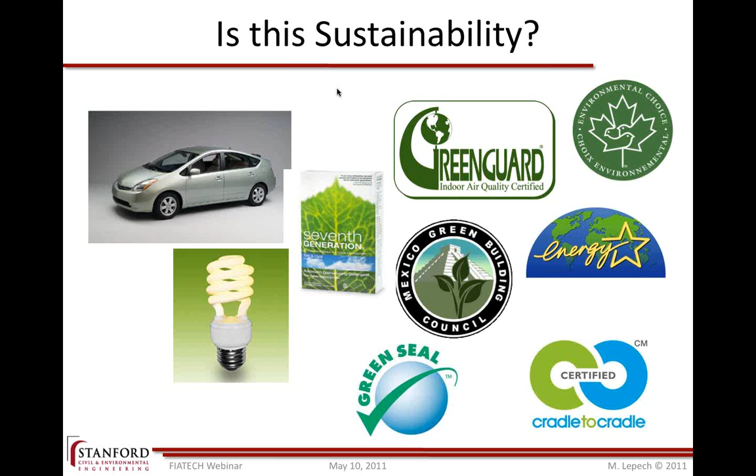The way we accomplish that here is by looking at the entire production, consumption process, and all of the material and energy flows associated with that. We start by looking at raw material acquisition, if we're constructing or producing any products—starting from where we get resources out of the ground, where they're processed, how they're manufactured, assembled, or constructed, how they're used, what the service looks like, how they're retired and recovered, whether they're recycled, remanufactured, or finally disposed.

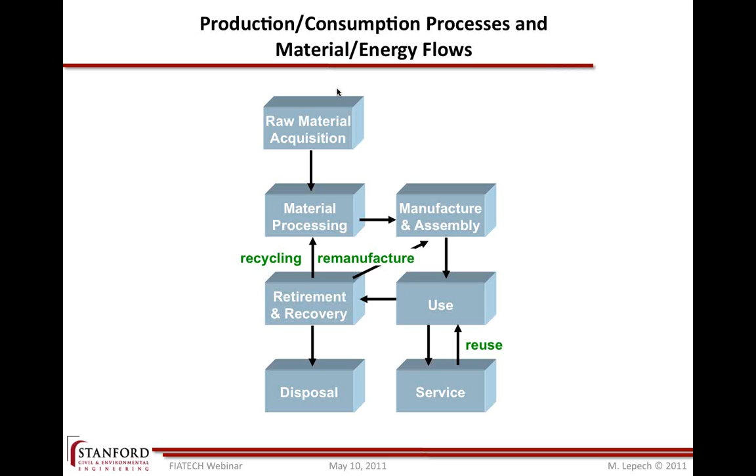So then what we want to do is put together a set of metrics that describe our ability to continue to do those processes in perpetuity, without harming ourselves or the natural ecosystems around us. So whenever we talk about sustainability, I want to talk about the specific metrics we're going to use to describe that.

We have a population here on the planet, and a set of needs we're trying to meet—to clothe ourselves, shelter ourselves, feed ourselves. In order to do that, we've come up with a set of highly complex production and consumption activities that provide all of our needs. And to do those activities, we've come up with a very complex set of material and energy flows to get goods and services where they need to be all over the planet.

And of course, when we engage in those activities, we force changes on our ecosystem, whether that's due to resource depletion, ecotoxicity, or something as controversial as global climate change. Everything we're doing has an impact, if not regionally then globally, on the world around us. So what we're really trying to do with sustainability is measure our ability to meet those human needs that as a population we've forced on ourselves.

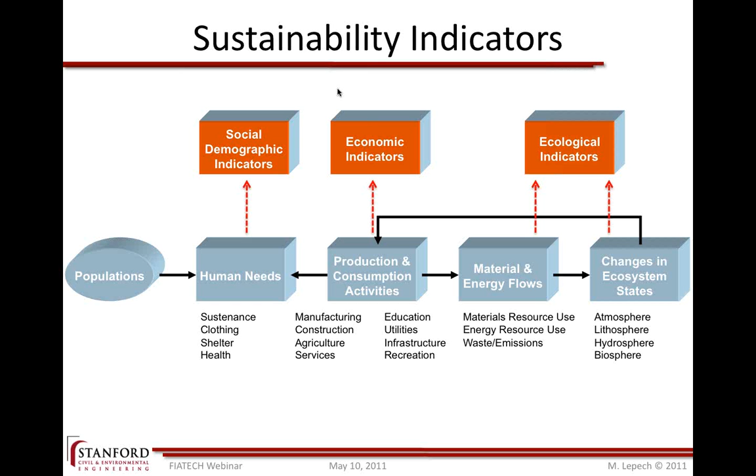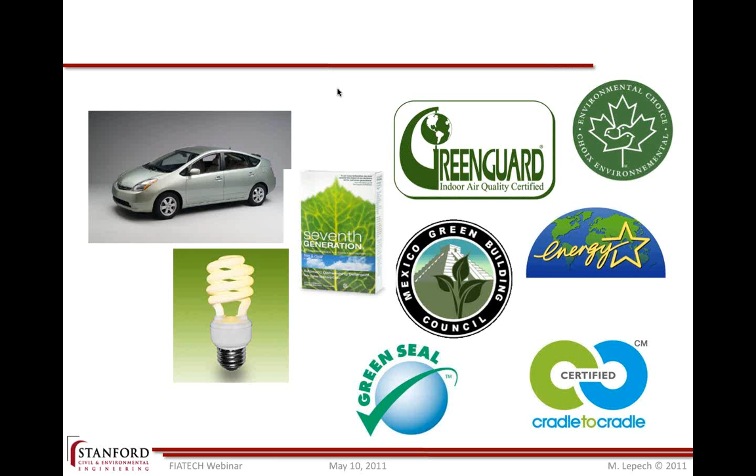But where does that relate to all of these labels and things? Well, we'll talk about how those actually connect. And then there's one type of green here in the United States that we're all very focused on—it has to be part of the equation for us to make sure this makes sense, because otherwise it's a very altruistic thing, and that's really not the point at all.

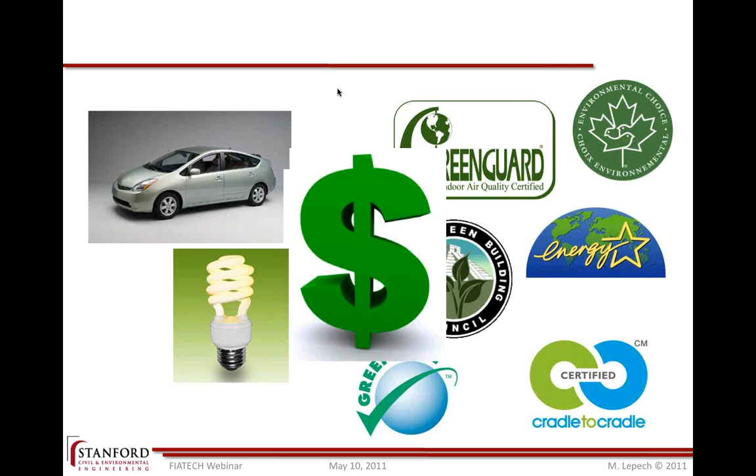So in the outline today, I wanted to talk about what quantitative sustainability assessment is, in particular life cycle assessment. We'll talk about how to link that to industry through the class that we have here, CE 226.

And finally a summary. So there are a number of standards that govern life cycle assessment, at least process-based life cycle assessment, and those come from ISO, specifically the 14040 series standards for life cycle assessment, and there's also 14020 that looks at environmental labeling.

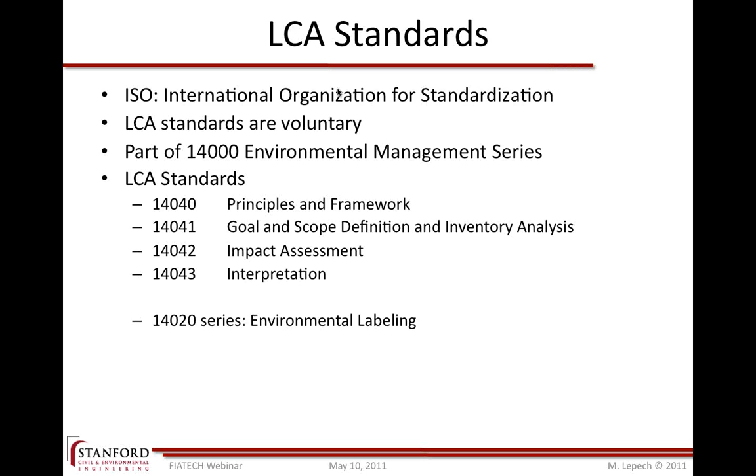So within that standard, we're guided to look at all of the different pieces of the supply chain going back to that raw material acquisition. And so we'll look at every single piece of that, and also those T's represent the transportation between each one of the nodes of the supply chain.

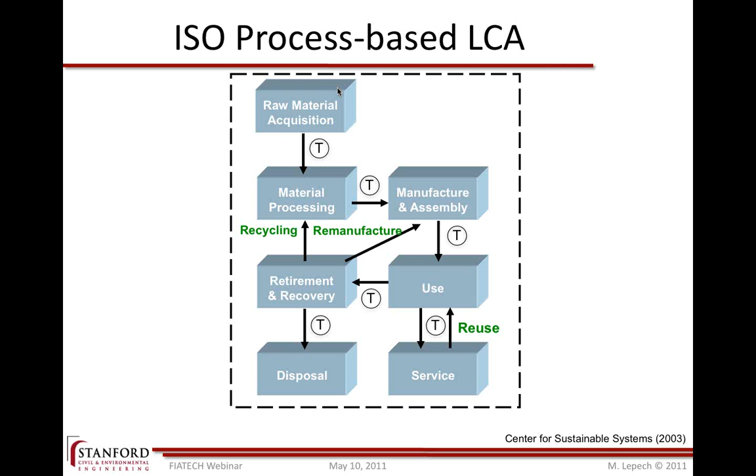We'll draw a boundary around all or part of that system, and then we'll start to measure things—everything that comes in and everything that goes out across that boundary: primary materials, recycled materials, primary energy.

We may also measure labor and capital. And then coming out, we measure things like air pollutants, water pollutants, solid waste, the products that we're actually making, because we're doing all this for a reason, and any co-products that are also produced. Those are things that have economic value, but weren't actually what we intended to make.

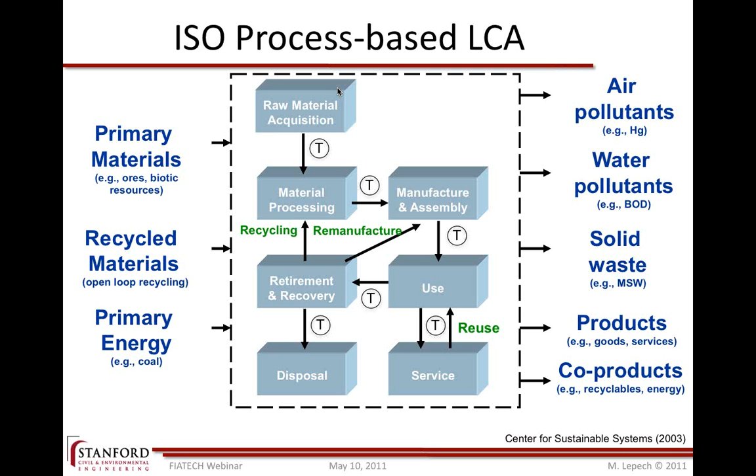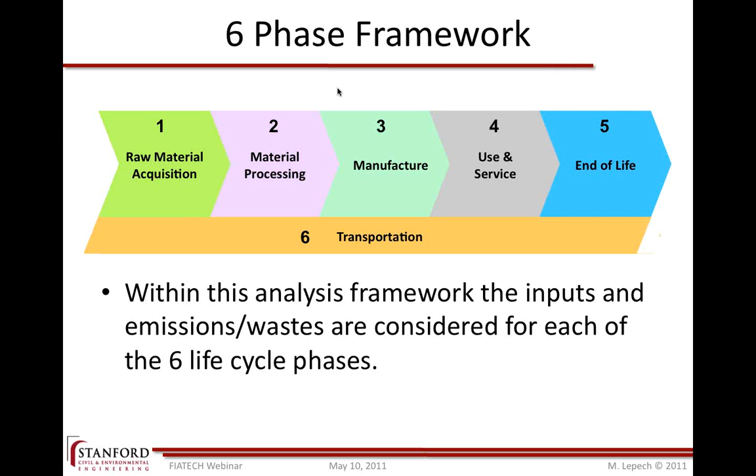So I refer to this as the six-phase framework. It starts with raw material acquisition, then material processing, manufacture, use and service, and end of life, and then transportation throughout. So within this framework, we want to account for all the inputs and outputs in each of these life cycle phases.

So what does this type of analysis look like? This is exactly what we go through and learn to do in the class that I teach here, and in the projects that students do with corporations.

This was an example that we did for the Monterey Bay Aquarium Research Institute. For those of you in Northern California, or who have visited, you may have been to the Monterey Bay Aquarium. They have a tremendous exhibit there for the sea life here in Northern California, and a research institute used to study the fish and keep them healthy. Also, when they're cleaning the tanks, they have some large aquariums that they keep all of their sea life in during maintenance.

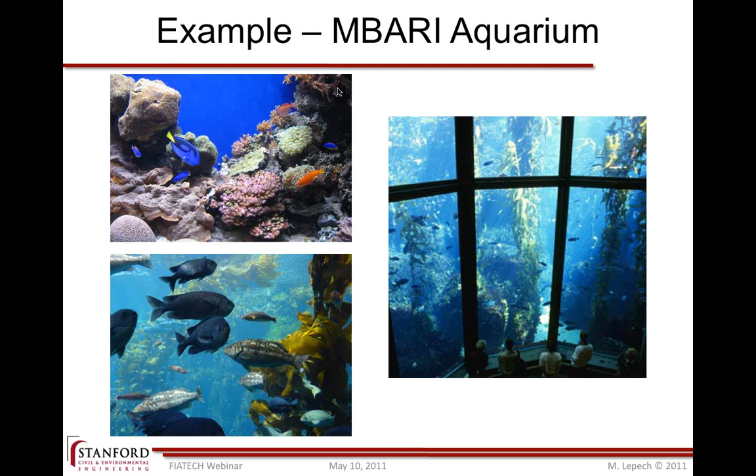So they wanted to build some new tanks at their facility, and being an ecologically sensitive and environmentally active partner, they wanted to compare the construction of a regular concrete tank, shown on the left, versus a tank made of fiber reinforced polymer. They had two bids for these, and wanted to know which one would be better for the environment, given that the price differential was so close.

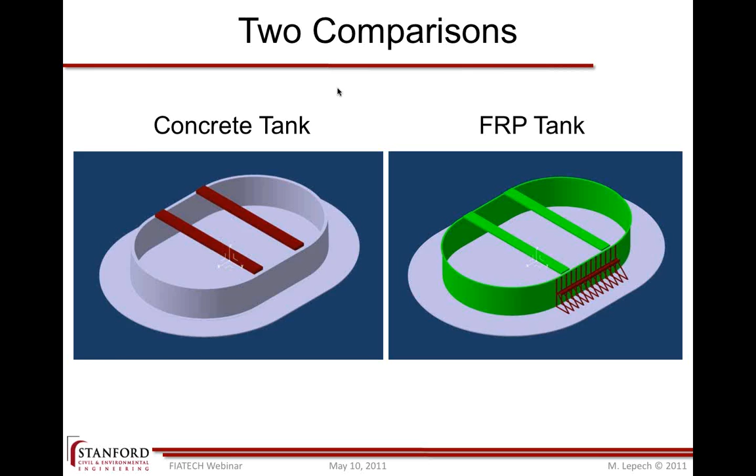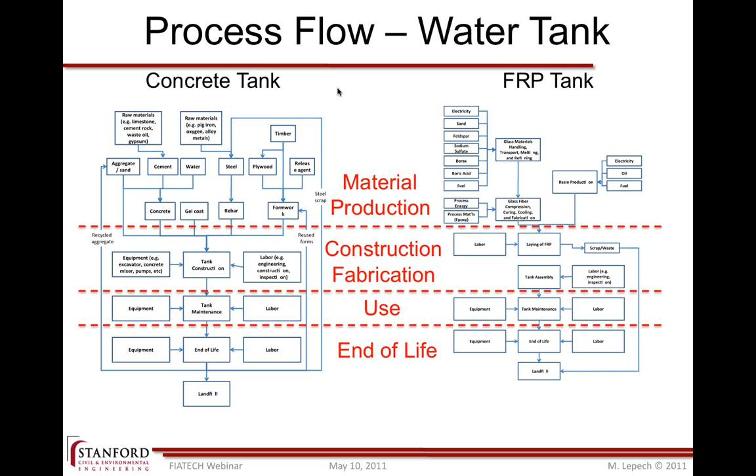So it starts with the construction. The students and researchers have to start by constructing a process flow diagram that describes how each one of these systems is built, used, maintained, and finally disposed of at the end of life throughout its entire life cycle. Along this process flow, we can see it divides into the material production parts, construction and fabrication, a use phase, and an end of life.

And then if I blow some of these parts up, we can see that the concrete tank requires raw materials of limestone, cement rock, gypsum, pig iron, and timber for formwork. We use that to make concrete, rebar, and formwork. For the FRP, it requires inputs of electricity, sand, borax, and fuel to make glass, and then electricity, oil, and fuels to make our FRP resins. We'll go back all the way through the supply chain to the extraction of those materials out of the ground.

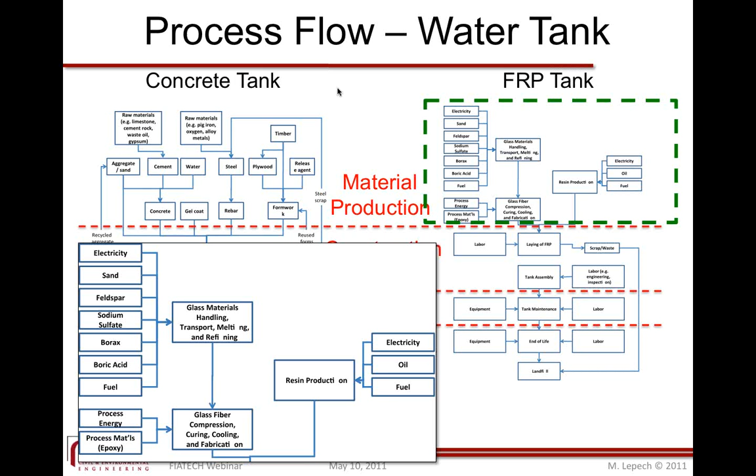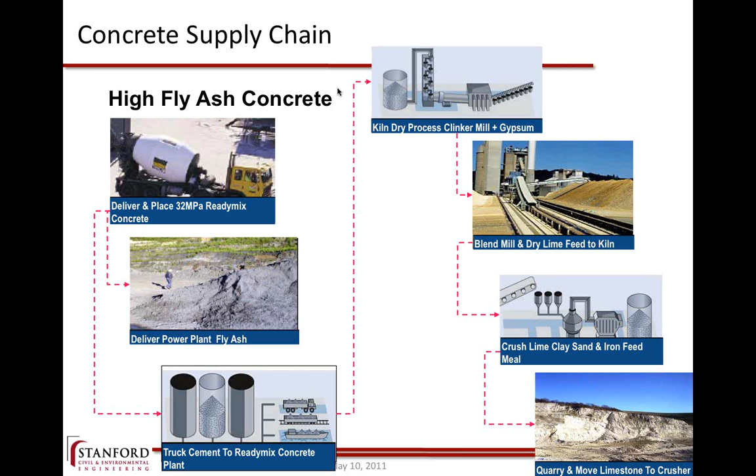So then we'll put together a high-fidelity supply chain model. In this case, this is the supply chain for the high fly ash concrete that they were planning on using, and we account for all of the inputs going in and out to get that concrete, from the limestone quarry all the way to putting it onto the site.

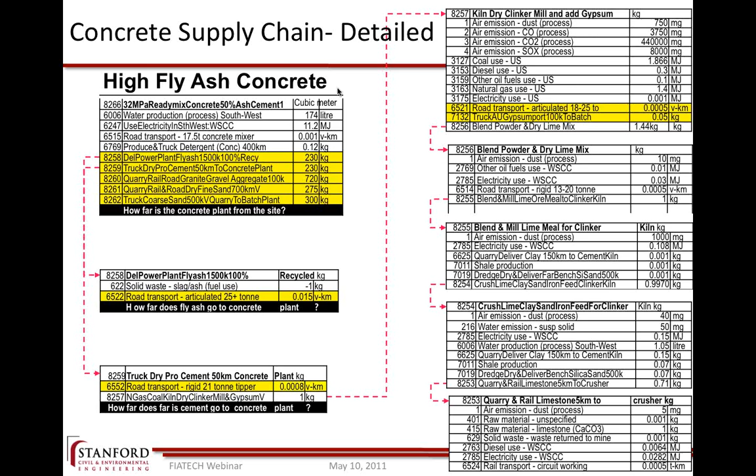Most people don't have a very good idea of what it takes to extract limestone, and how much energy, material, and emissions are associated with the removal of limestone, or the production of electricity or fuel oil. So what we rely on are industry data sets that give us this information in aggregate for the entire industry, called life cycle inventories.

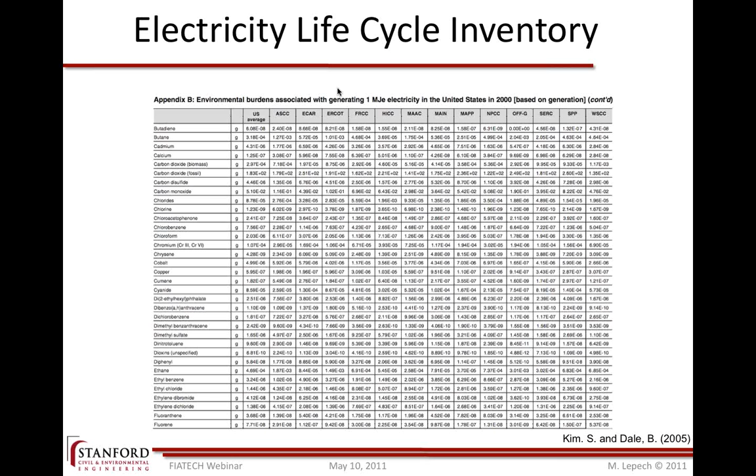Here we're looking at the electricity life cycle inventory for the United States. I'll blow up a small piece showing that for the production of 1 megajoule of electricity, our functional unit in this case, we can see the average emission from a U.S. power plant. Here's everybody's favorite emission, carbon dioxide, fossil-based. To make 1 megajoule of electricity, we release approximately 183 grams of CO2 on average.

We can use data sets like this to go back and determine how much electricity was consumed in production along the entire supply chain, and then compute on average how much emission and what emissions are associated with this activity.

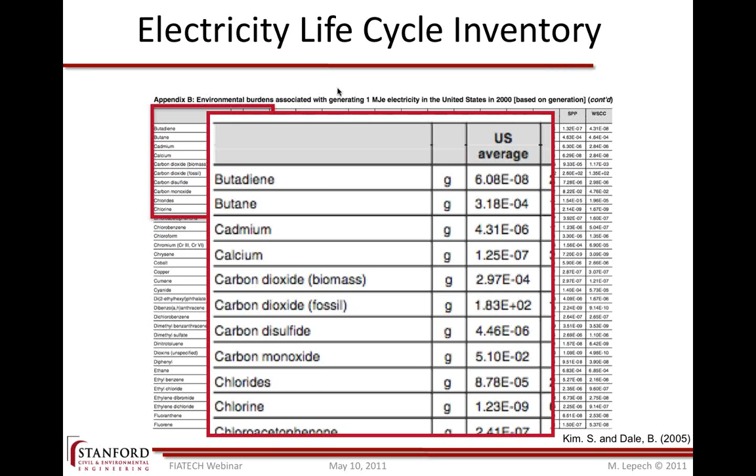Similar data sets exist for all kinds of different materials, not just energy. Here we're looking at a process flow diagram for the production of polymers. Most of our polymers come from crude oil, natural gas, and brine, and through all kinds of chemical processes, we can make whatever we want.

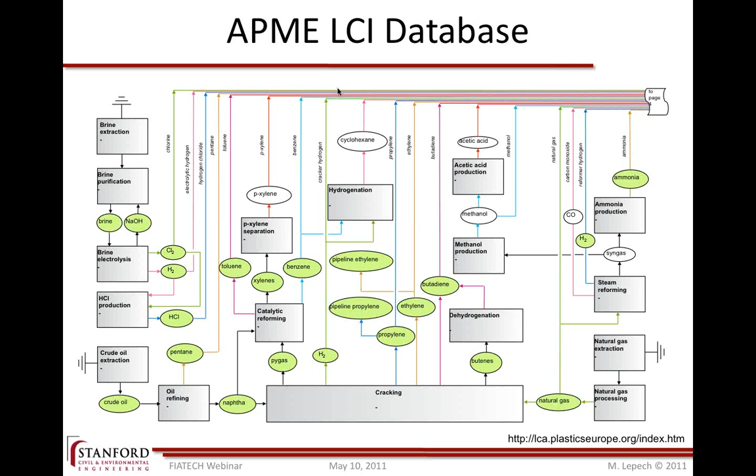In this case, we're looking at the life cycle inventory, or LCI, for a high-density polyethylene resin. To make 1 kilogram of HDPE resin requires approximately a total energy input of 77 megajoules.

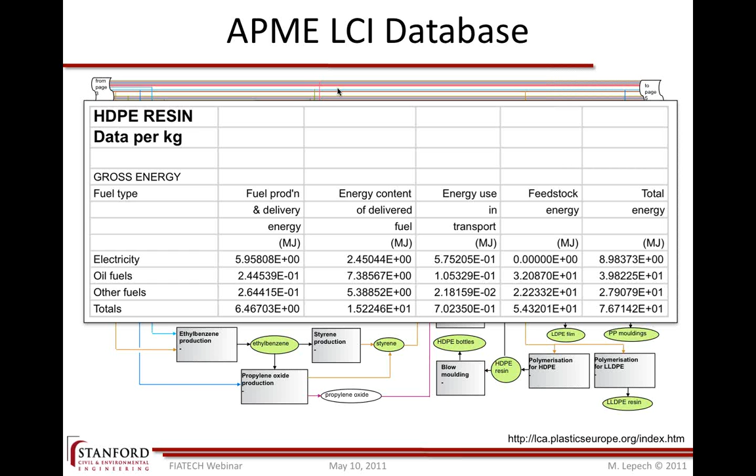So if you know how many kilograms of material in your quantity takeoff, you can start to determine what the impact of your project is going to be.

Once again, here we're looking at the air emissions associated with that same kilogram of high-density polyethylene. Looking at CO2, roughly a kilogram and a half of CO2 is released from extracting the oil from the well to producing 1 kilogram of HDPE. So every time you look at one kilogram's worth of HDPE, there's about a kilogram and a half of CO2 in the atmosphere associated with that production.

Once we have our process flow diagram and our quantity takeoff from our structures, then we can start to get a larger idea of what the overall impacts are going to be for these processes.

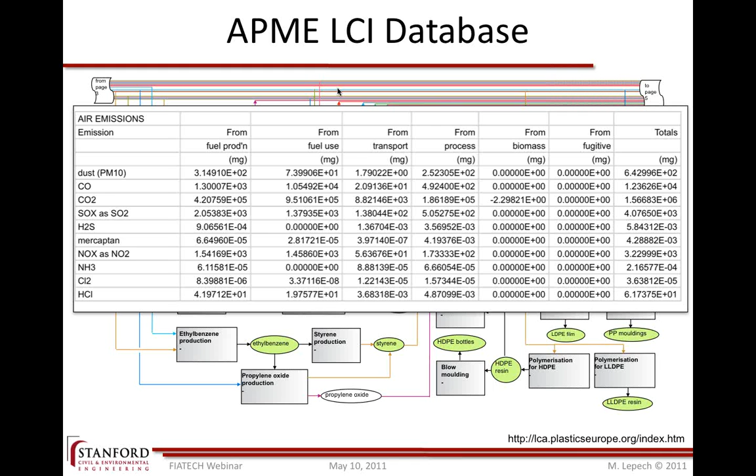Then we'll take all of those specific emissions, listed in a big, long laundry list of impacts, and group them into input-related and output-related impacts. Input-related impacts are things like abiotic or biotic resource extraction, so renewable versus non-renewable resources, and also land use. For output-related categories, we take emissions related to global climate change and group those together, as well as those related to ozone depletion and human toxicity, grouping these into a relatively small number of impact categories so we can start to make choices between them.

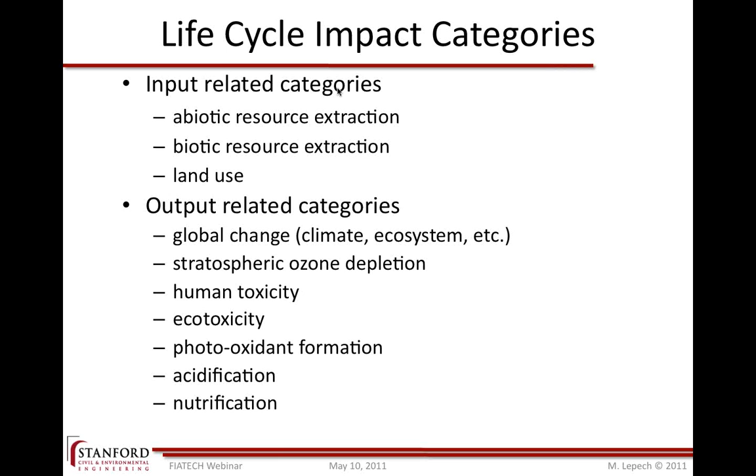So you can start to make comparisons between products or product decisions as to what you want the footprint to look like. And of course, in most cases, you're going to be going with a smaller footprint.

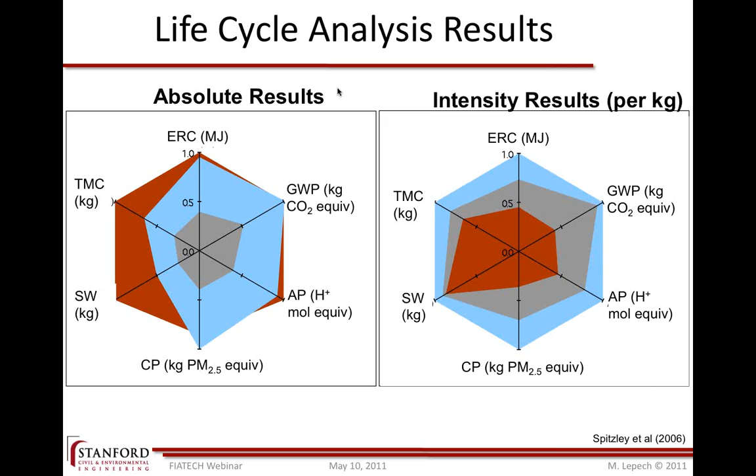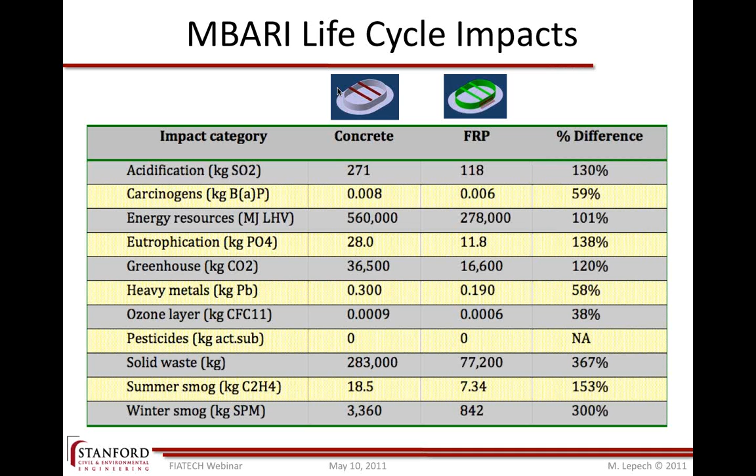Then we look at the percentage differences, and we can start to see if indeed one system is better than the other, all the way back from the initial start of the life cycle. At that point, we want to get pushed forward to drawing some conclusions and making some recommendations. So we can start to weight among the various factors, identify major burdens and impacts, and then select among the alternative design decisions.

So at that point, I don't know, Nicole, were there any questions that came up, or are we doing okay? Right now, we are okay. We have no questions, but folks who do have any or want clarifications, please use the questions tab and type those in. Do you have any questions, Nicole? No, we're all set. Okay, good.

All righty, so that's kind of the overall structure of the class, and what we try to accomplish over the course of the quarter.

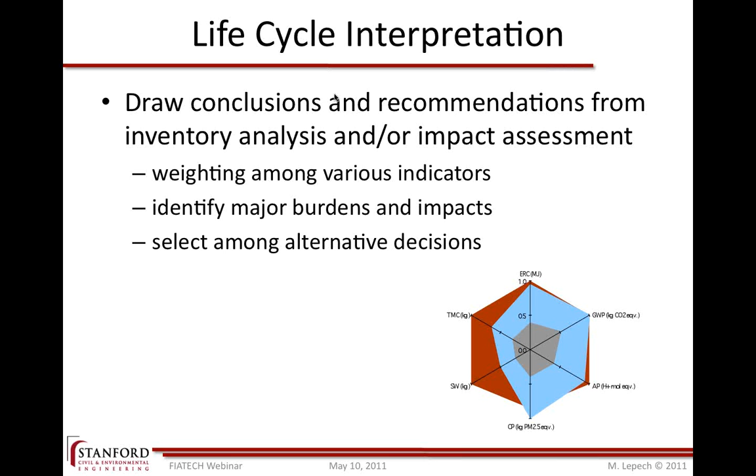After that, the major focus of the class is linking to industry, done through project-based learning, where we bring in corporate partners to work with small groups of students. The corporate partners have identified a specific project they're working on that they think an environmental analysis like this would really benefit. So what we're trying to accomplish is training an entire new set of engineers, construction managers, structural engineers, product engineers, and MBAs who are cognizant of the methods we can use to analyze for environmental sustainability, and then quantitatively manage towards quantifiable environmental goals.

So in this case, I wanted to talk about one of the projects that one of the student groups did. This was a project proposed by PPG. PPG makes glass fibers and other glass materials, and they were proposing a new type of bridge deck that they wanted to bring out to industry. They were proposing this as a very green and environmentally beneficial product compared to the way bridges are currently constructed by the DOT.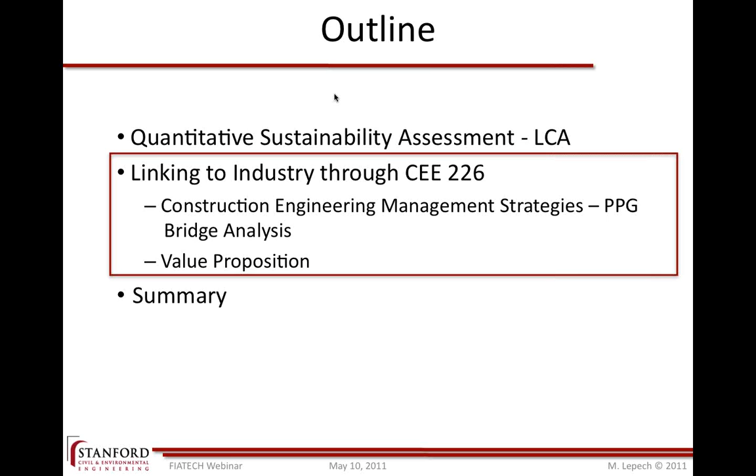So the motivation for this project was that they wanted a life cycle assessment and also a life cycle cost comparison to support some new product development.

They have a regular concrete deck with a variety of attributes, having the cement, the sand, and the steel reinforcement, relatively slow curing, permeable to water, with volume changes, and corrosion affected by the pH and the chlorides.

And PPG was proposing a new deck made of a different type of concrete, a grancrete, with a composite reinforcement, a fiberglass mesh, that was a fast curing deck, impermeable to water, with high tolerance to temperature change, and relatively no impact from pH changes due to salting of the roads, which will often lead to corrosion.

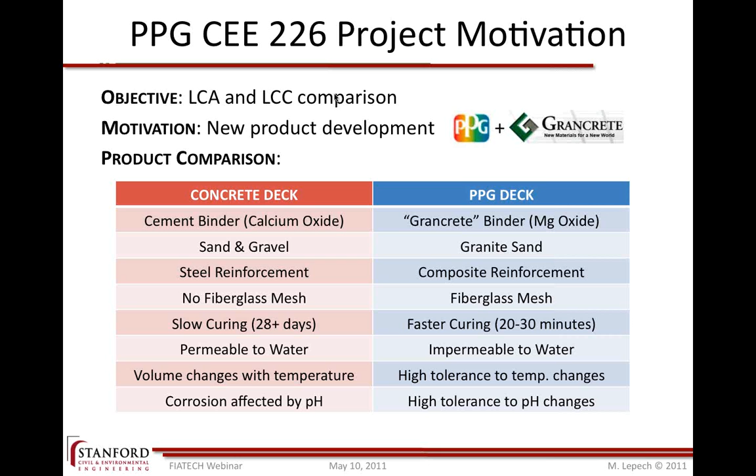So the students needed a way to try to gauge what the impact of these two systems was going to be, and then try to make a decision throughout the entire life cycle of which one was indeed better.

So to do this, they said, well, we need a way to determine what the impacts of the pre-construction and construction phases are going to be, and then we need some way to manage those over the course of the project, determine what they're actually going to be on the project site, and then maybe enact some controls to make sure those two things line up very well.

So the way the student group proposed doing that was combining a 4D BIM model with a life cycle assessment model, as we learned in class, to come up with a set of time-dependent impact budgets over the course of construction, so they could see and model how impacts were going to accrue as a facility, in this case the bridge deck, was constructed.

Then they could combine that with some job site data they had gotten from Caltrans and their same life cycle assessment model, to figure out if that was really the way emissions occur on a job site. And then they proposed a number of methods to engage in impact variance control on the job site.

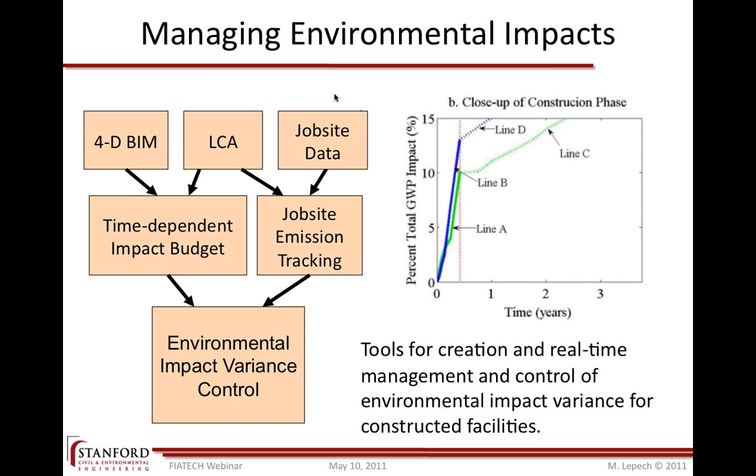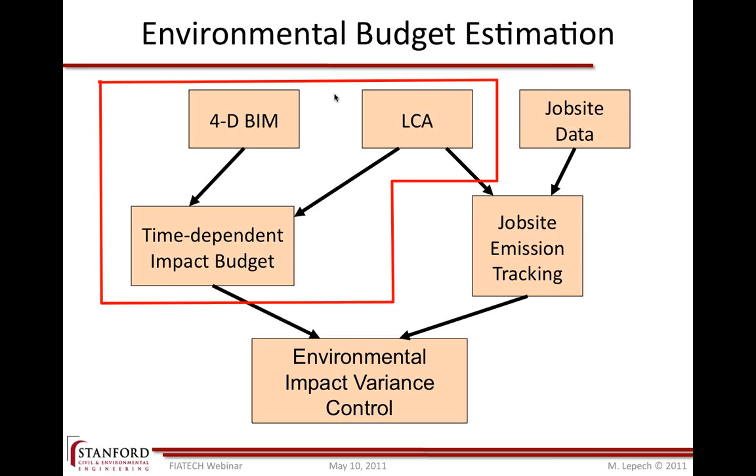So like I said, they started with combinations of a 4D BIM model and an LCA to come up with a time-dependent environmental impact budget. This is what the predicted impact of the construction was going to be as it was completed.

This was done at the activities level of the work breakdown structure so that they had a chance to tie the life cycle assessment data sets that were out there to accounting level based activities at each part of the job site.

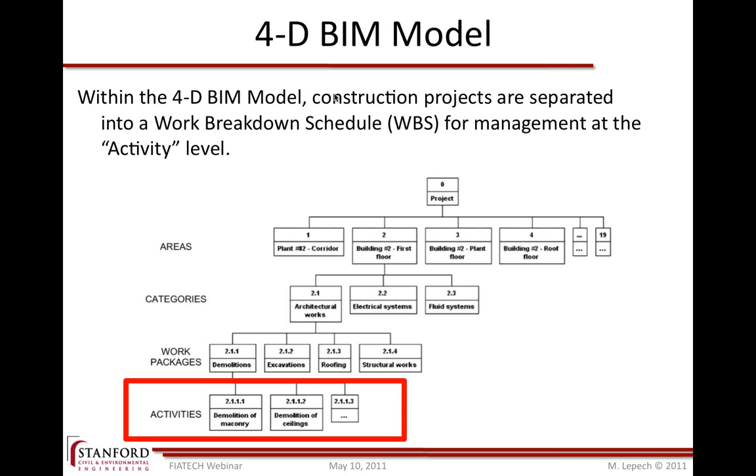So then they came up with a structure to integrate the BIM model and the life cycle assessment. They created a BIM model for each of these two bridges, a 4D BIM model, that interacts with a user interface for their life cycle assessment program, which outputs a CSI master format code for what that activity is that's being done.

In this case, they were installing some riprap. That user interface interacts with a code array that lists all of the materials associated with that activity, and it also denotes the crew that's going to be needed for each of those activities.

Then that interacts with a life cycle inventory data set that ties the life cycle impacts associated with each of those activities or materials inside the activity code and returns the impact of that specific activity.

And so you can see in this case, looking along the top line there, that in order to install 1 ton of riprap, the impact was about 1.7 kilograms of CO2.

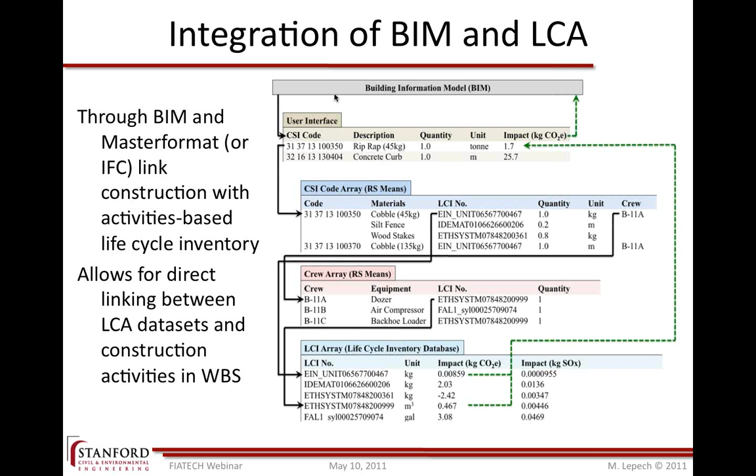So then, just as an example on this project, they came up with their construction activity list, which had a partial quantity takeoff of all of the work that was going to be done in order to do one of these Grancrete installations.

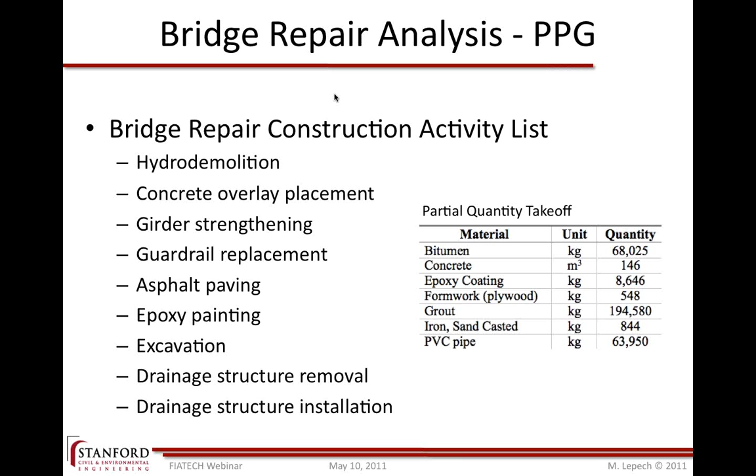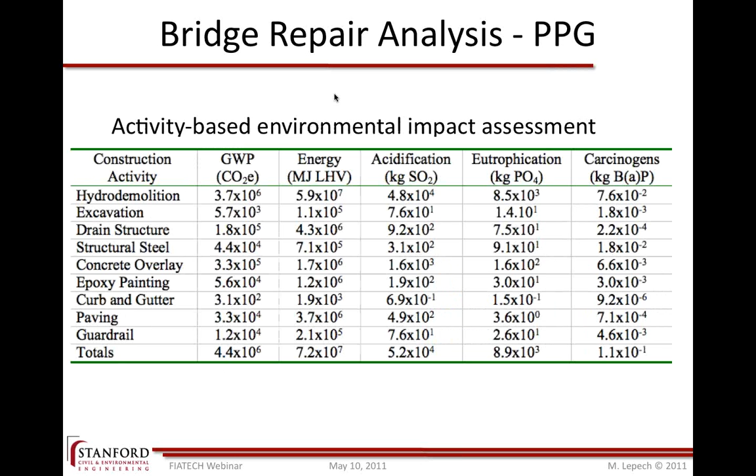And so then they come up with an activity-based environmental impact assessment so that they know for every single construction activity what the global warming potential, energy consumed, acidification, biological oxygen demand, or eutrophication would be, so they can link that up with their activity timeline to come up with a time-dependent impact accrual budget for every environmental indicator associated with the project as they're accrued throughout the construction work. This gives them their basic approach to controlling impacts.

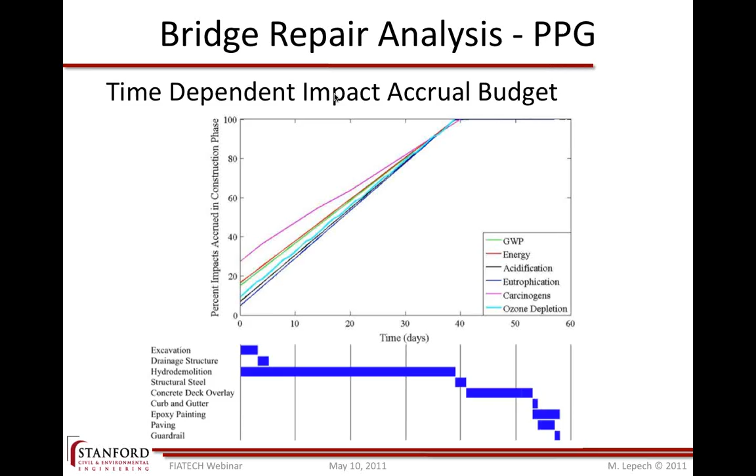So then they needed to come up with a system for actually tracking these. In that case, they were combining a life cycle assessment model with some job site data to come up with a job site emission tracking approach.

There they were getting information from Caltrans and also the Michigan DOT. But they had also proposed the use of time cards, GPS tracking equipment, time-lapse photography, a variety of ways to quantify exactly what equipment is being used on site and how long, what idle times were, what work is being done at each given time, and from that you get your ongoing accumulated work impact.

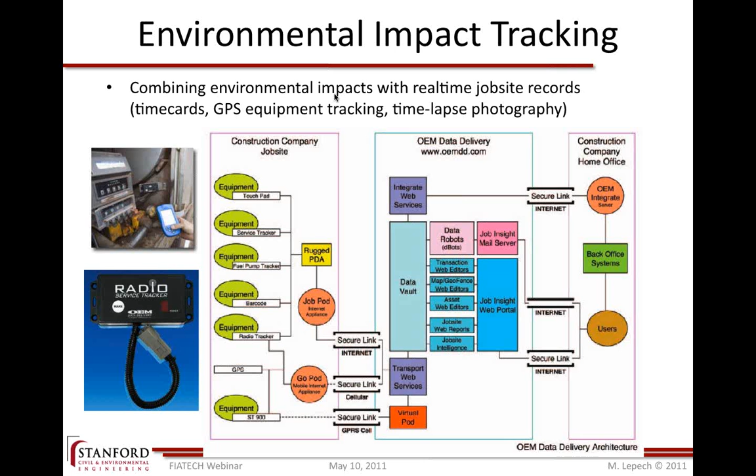And so these are the kind of data sets they were getting off of the job sites that show the specific type of equipment being used, its run time, its idle time, and by linking that with our life cycle assessment model, we can get an up-to-date real-time accrual of environmental impacts on the construction site so that we can compare those to our budgeted numbers and work to manage those to the lowest possible impact using relatively traditional construction management techniques.

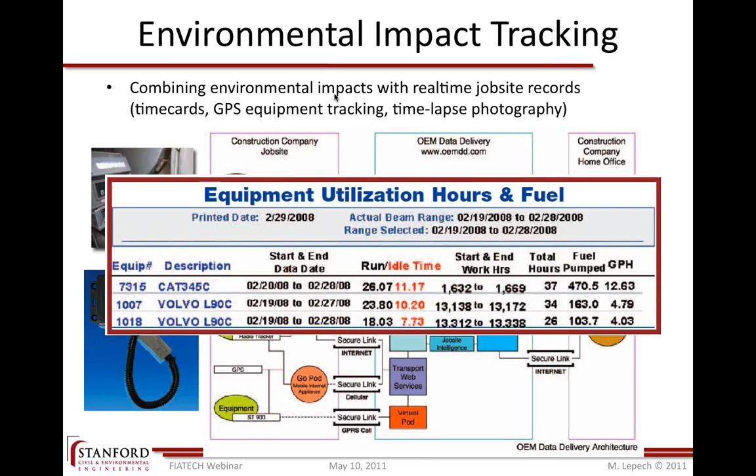And that's where they propose the environmental impact variance control over the course of the project. So this is what that ends up looking like as far as the impact lines that were created.

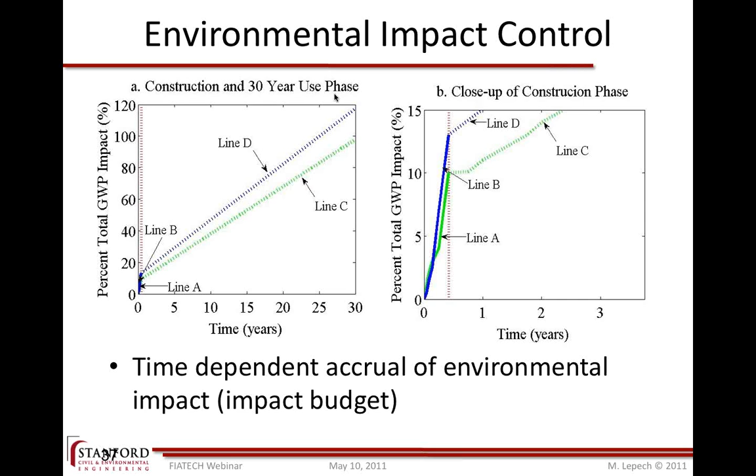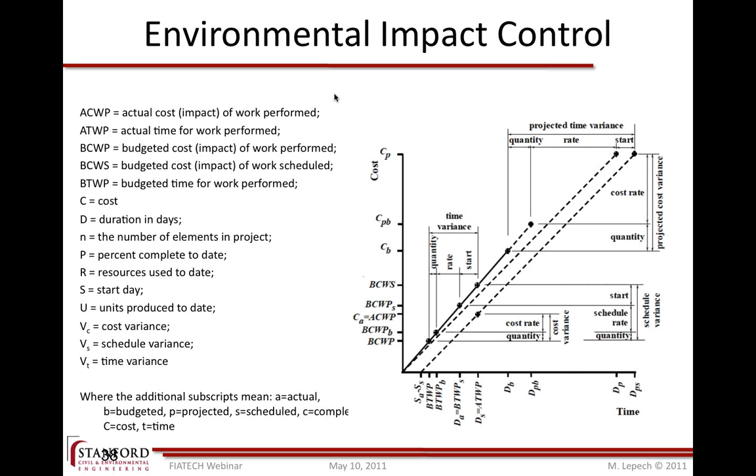And then it just uses traditional schedule and variance control to manage impacts over the course of the project as you start to reach completion. By modeling how that would be done, they could come up with some good estimates for what the predicted impacts for these specific projects were and what the actual accrued impacts would be based on how work had been done traditionally here in California, and to see how these two bridge systems compared.

But after implementing the system and optimizing the PPG system for the time of construction, for the impacts being accrued and the supply chain being used, they significantly reduced the impacts without changing the cost of the system. I specifically picked this example because it has such a dramatic reduction in impacts. This also accounts for changes in traffic and recommendations on what type of structures you'd want to apply these PPG bridge decks to.

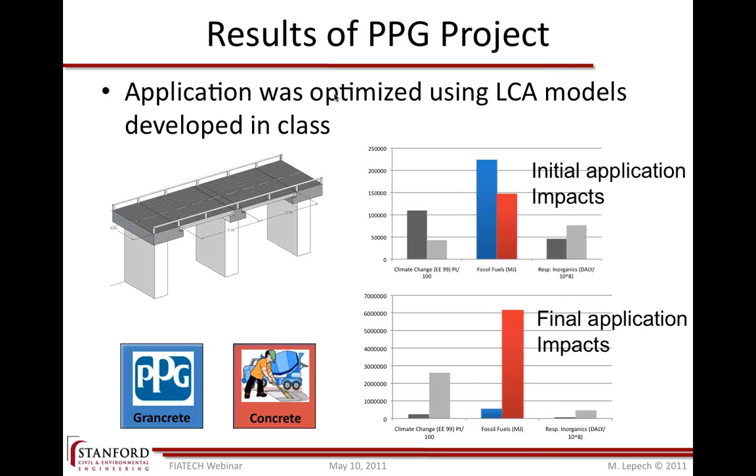So here what we're looking at is the prediction of life cycle cost for each of these two systems. This cost includes environmental impact costs and social impact costs for each system. Their recommendation was that at a relatively small number of vehicles per day, it makes sense to install a concrete deck because the overall costs are lower. That's simply because the vast majority of environmental impacts and associated costs accrue from traffic delays on the construction project.

The actual materials being used are relatively small in scope and scale of impact compared to the traffic. So after a certain number of vehicles per day cross the bridge deck, it makes far more sense to implement the PPG system.

Along with the optimization that was done, the students came up with a set of recommendations for how you would approach a DOT to say these types of projects are good, and those other types with low traffic counts are poor. That way we could make strategic recommendations for what materials to use, what supply chains to use, what construction practices to use, and also what projects to actually bid and go after that made sense from the standpoint of an environmental sustainability argument.

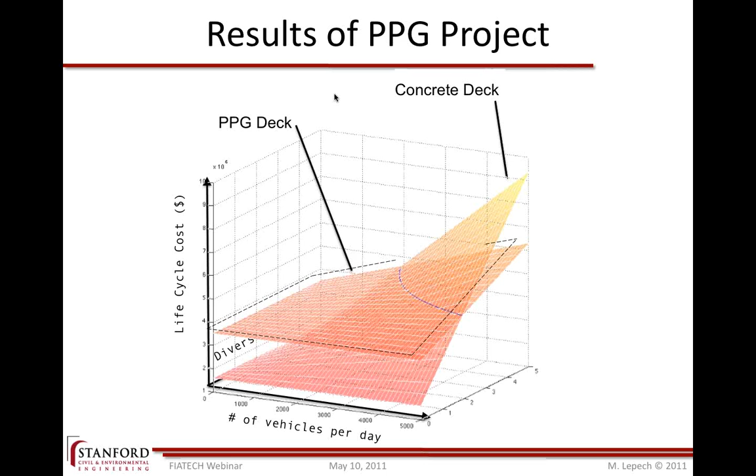Yeah, so as far as the setup to do the analysis, no, it can certainly be stretched to other industries, and that's actually a really good transition into all of the corporate partners we had this past year for the class. We did projects with all of these corporate partners, so you can see a range of industries, whether it's DPR and Webcor, PPG, of course, all the way to Cisco and Hewlett-Packard. So while this project was very focused on construction, certainly the framework and the lessons taught through the curriculum, and also the software we use as the engines underneath this with the life cycle inventories, are very applicable to lots of other industries. It just takes some work and some knowledge to tie those existing data sets and inventories into the industry you want to apply it to.

One example we've done a lot of work with is Steelcase, a furniture manufacturer. In that case we tied these types of decision-making tools into their product design cycle, and a group of students created some Excel-based tools for the designers at Steelcase to be able to quickly evaluate the impacts of different material choices in their furniture designs.

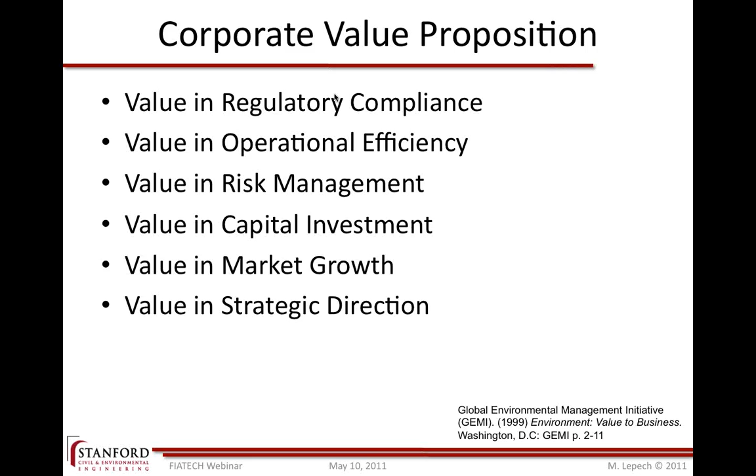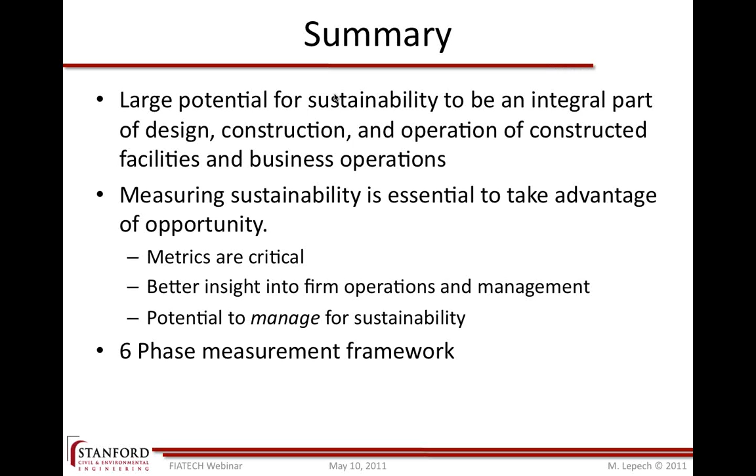When it's done right, quantitative sustainability assessment can be a really great tool in prioritizing initiatives and projects. Which part of the supply chain should I look at? Which activities generate the most impact? And if I was going to try to reduce impact quantitatively at the lowest possible cost economically, where would I focus my effort? It helps in achieving real goals of sustainability, and it's not just meeting a label, but rather looking at a real emission that is the link between human activity and ecosystem degradation. It also helps align desires for profitability with desires for broader economic development, social equity, and environmental protection, because we're doing this all in the context of managing for environmental impacts with at least marginal economic cost, so there's ability to do cost-benefit analysis between the desire to achieve environmental and social goals while still making sure economically we're not devastating anyone's profitability.